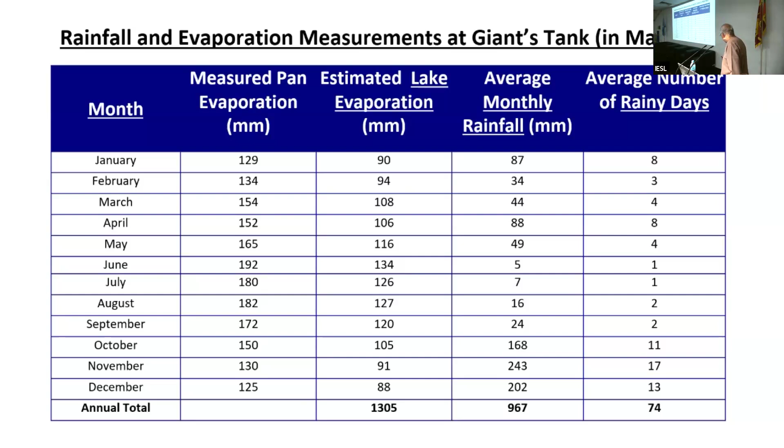And if I put it in this diagram, we can see the rainfalls are, this is the rainfall, that's only October to December. And the rainfalls in June, July are very small, hardly any. And these are the evaporations. The blue color is evaporation.

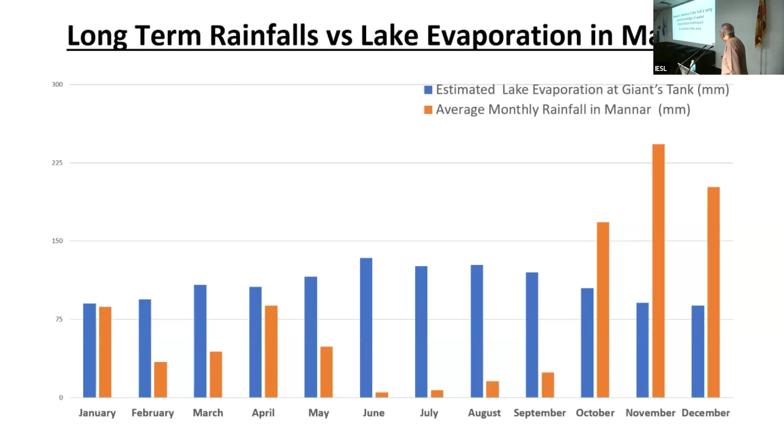And this shows that to survive, the Yakshasha tribe, to survive in that area, they should have had a very good knowledge of water conservation techniques. So I think Mr. Manapiri's view, I don't know whether he did a study, but his view is correct. That's what I believe. So the Kueni Yakshasha tribe they would have had a very good knowledge of water conservation techniques to survive in the area.

And furthermore, I could add that now Vilpattu, Pattu in Tamil, is Ondurendu Mundu Nalu up to 10, the Pattu is 10. So Vilpattu, those are again not natural lakes, but man-made ones.

And this is the palace of Kueni. I managed to get some photos, palace of Kueni at Kalivillu inside the Vilpattu Park. This is again another view of some other remnants of Kueni's palace. And possibly this is the burial place of King Vijaya. I don't know. This is just a guess.

Coming on to the dams, all dams of Sri Lanka are... but before that, I must tell you King Vijaya reigned from 483 to 445 BC, 38 years, and he did some work. He constructed small ponds and small diversions. That's how he continued.

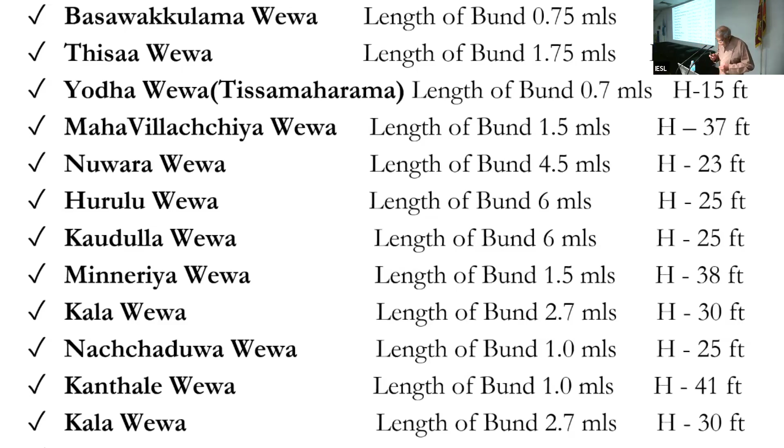He would have used cattle, elephants, or whatever, or given say a 6 mile long bund to a certain village, with perhaps a village headman supervising. But the problem is, if there's some lack of quality, once the reservoir is full, it may breach, because while we are sure of our present day soil mechanics, the king's methods are under threat in that sense. So if it fails, that's the problem.

But I should say this one, this is Minneriya tank. Mineria tank, I was told, has never breached, and it has served probably 1,700 years, every Yala and Maha season, if that is correct. King Mahasena, who built this, is treated as a deity, as a god, and people still respect him.

If you go to Polonnaruwa on the way, you come across Minneriya tank, which has a 1.5 mile tank bund. If you haven't been to that place, please take a drive on that tank bund. Every Wednesday and Saturday, Kemmura Davas, they make offerings to Mahasen Deva. Take a drive, it's quite scenic. On this side the lake, the Parakwas, Mineria Lake, and on the other side you have the giant sluice and all that. It's an amazing feeling. So please take a trip to that.

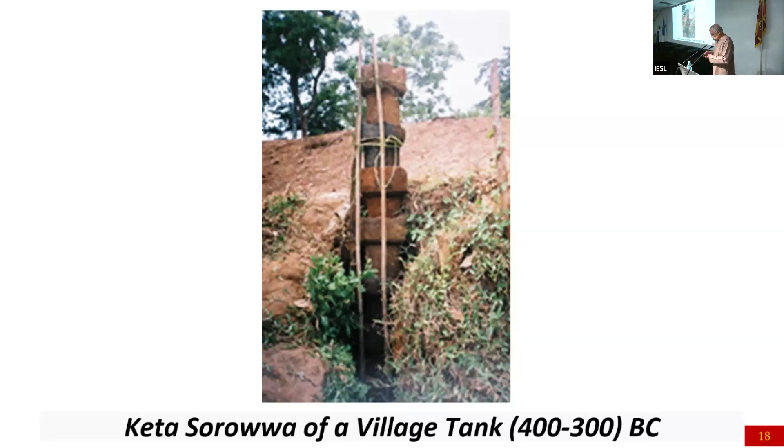You keep going, up to a man's height. At the top, once the reservoir is full and going down, you take the topmost kate off, then water spills over and it acts as a sluice - so spill cum sluice. Amazing, this was done in 400 BC. This is a close-up of the Keta Sorowwa.

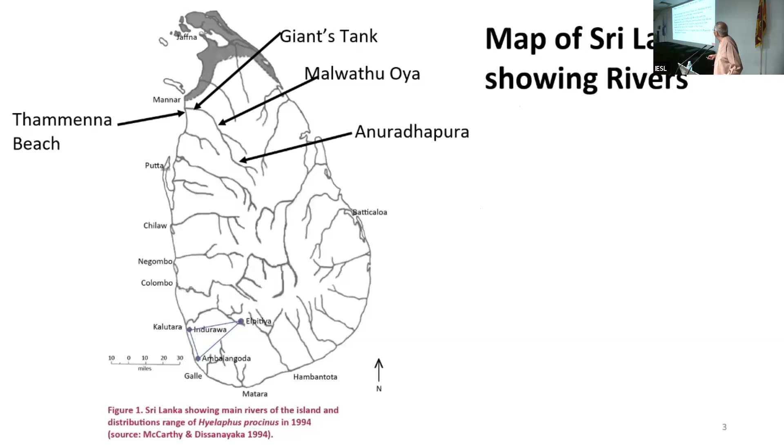Now getting on to - that was for small heads, Keta Sorowwa was for lower heads, but for high heads, what happened? Excuse me for this. This is an excellent innovation by the local engineers at that time, introduced during King Vasabha's period, that's 67 to 111 AD.

But no one knows exactly how it was operated. RL Brohier - sorry, not RL Spittle - RL Brohier did a lot of work, but he's basically a surveyor. He tried to figure out how it operated and wrote books, but no one really knows how it is operated. Some people believe it was over a pulley and pulled by elephants, but whatever it is, there's a sort of double barrel there, merging as per the power needed to pull through.

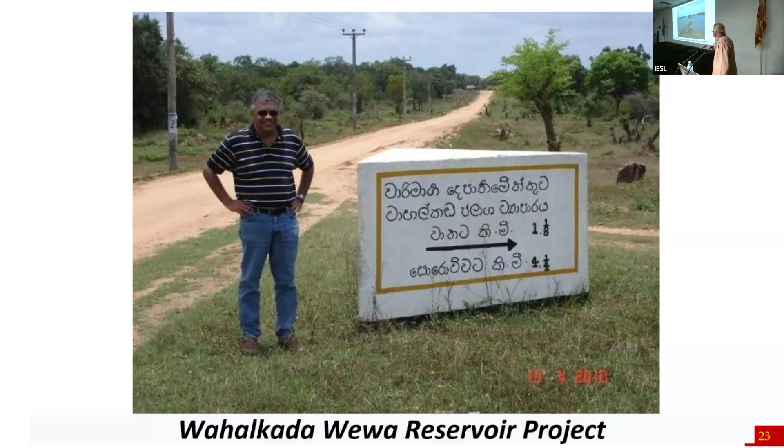So what we did was we did the breach filling at Wahalkada, and it's all jungle. Then the irrigation department has survey maps, and with these maps the irrigation engineers decide where we are going to have the sluice.

But there's a little criteria involved in this, where to locate the sluice. It has to be the highest point of the irrigable area, because it's going to feed water under gravity. At the same time, it has to be the lowest point of the tank bed area, because if it is not at the tank bed, there will be a dead storage, and dead storage is useless.

So with our irrigation engineers locating where to have the sluice, our irrigation people started digging to establish the new sluice there. And we found the old sluice in that very same place. That means our ancient irrigators had known to have the same location, but we couldn't preserve it. It was in pieces.

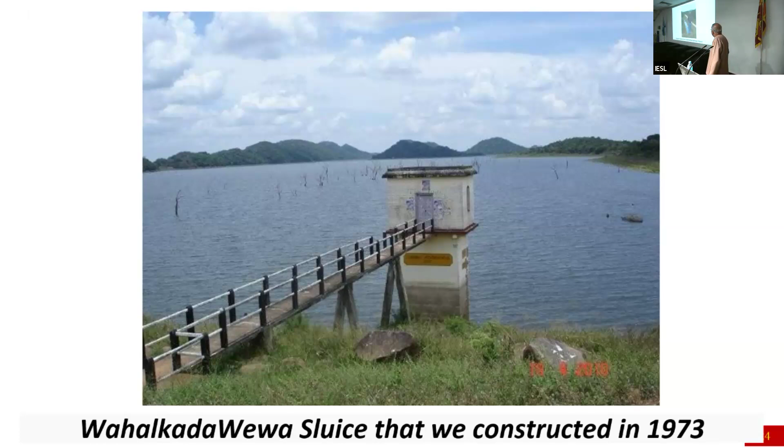This is a channel out from our Wahalkada sluice. This is the preserved Maduroya old sluice. Apparently this is a double barrel structure, and how it was operated, we don't know. We are yet to investigate. There are these stones, all neatly cut and all that. There's a lot more to study on it.

Kalawava Yodala was built by King Dhatusena in 470 AD, and it's a canal joining Kalawava to Tisawava in Anuradhapura. I'll come to it in detail.

But the next one, Alahara Minneriya Yodala, was built by damming and having an anicut at Amban Ganga and taking water. It was built by King Wasaba in 100 AD. This Alahara Minneriya Yodala, after 20 miles, comes to the bifurcation structure called the Dia Beduma, which I'll show you a picture of. The Dia Beduma divides flows to Giritale and Minneriya.

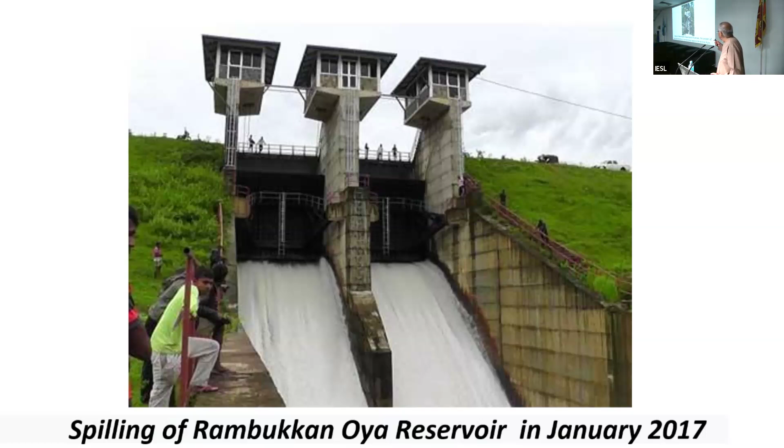Now, getting on to this experience, experiences in the 1978 flood of Parakrama Samudra. What happened was...

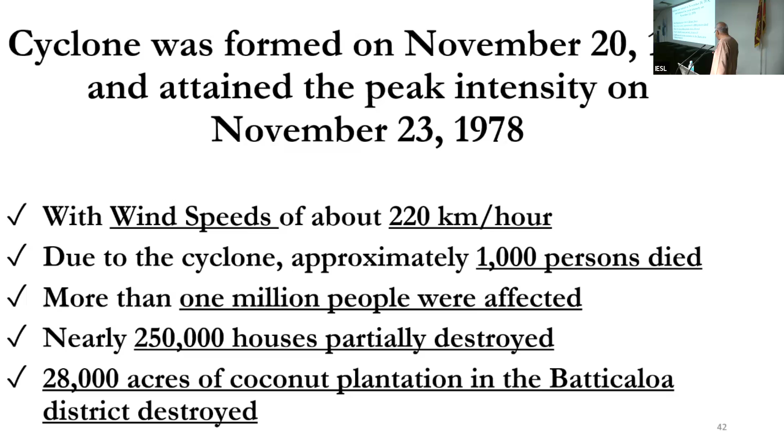That particular day, the Daily News front page ran a helicopter shot showing water overtopping the bund. Mr. Olson Guruwardhana was the director. He called myself and Tilak Nikapitiya, showed us this, and said take a 4-wheel drive and go meet Mr. A.D.S. Gunawardena, who was the I.E. Polonnaruwa.

We did, and also under Mr. Olson's purview, there were drillers who had got caught up in the floods somewhere, and soil testers who were working there. So we had to rescue some people like that, the hydrology people as well. Anyway, we met the ADS, and that's the story.

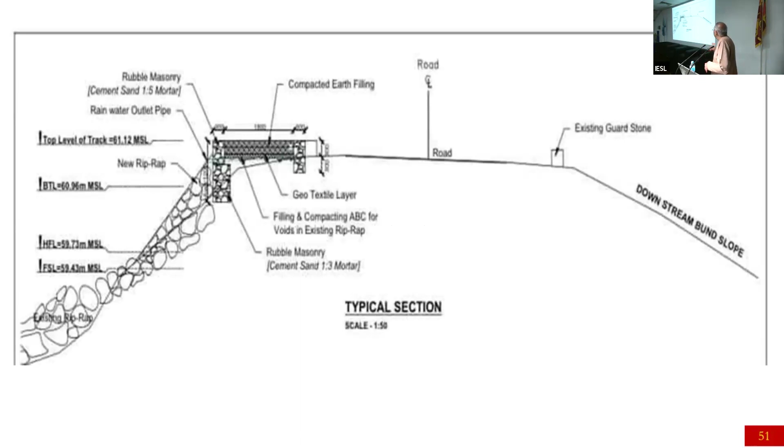They wanted to do it, and the funds were arranged. We managed to get the particular sketch, and this was probably not an engineer's design drawing - some draftsman would have done it. Anyway, whatever it was, they wanted to introduce a jogging track, disturbing the King's Bund.

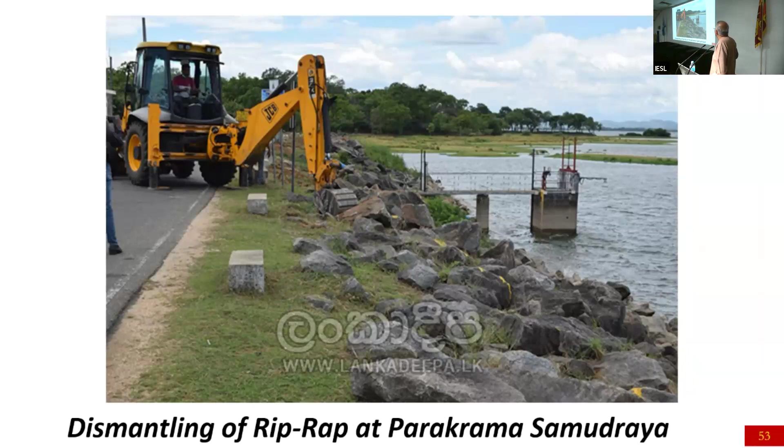What happened was, on the bund, they had drawn some yellow lines, and anything on top, the riprap, was rolled down to the tank bed. I managed to get some photos from Lankadeepa - this is them rolling down the riprap, happy to put the jogging strip there.

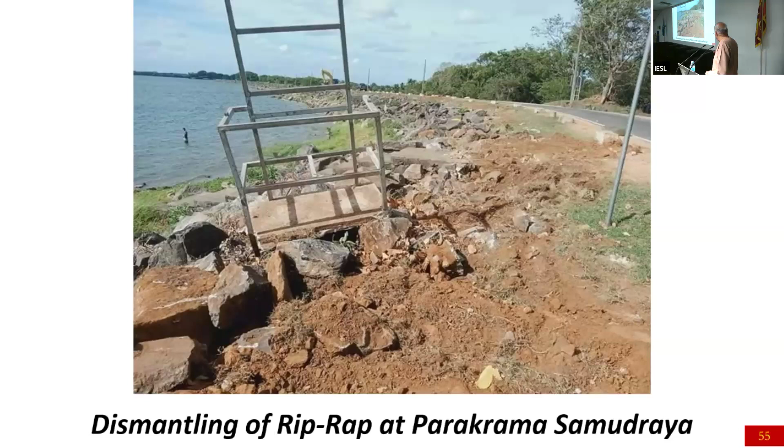And this is the dismantled thing - the dismantling of Parakrama Samudra.

What happened was, Tilak Nikapitiya, myself, Mr. A.D.S. Gunawardena and Austin Fernando wrote a report. We sent it to the Irrigation Ministry, and we managed to show it to Mr. Sirisena.

He was just an MP then, not the president - just an MP for Polonnaruwa, and probably he had some grievance against Roshan Ranasinghe. So we explained it to Sirisena, but nothing happened.

Then we wanted to explain it to Minister Chamal Rajapaksa, but that was not successful either, and Gotabaya Rajapaksa was inaccessible.

But what happened is, luckily or unluckily, the country went bankrupt, so the money was stopped. Then our argument was: if you leave it like this, don't leave it - if a 1978-scale flood comes, this will be gone.

So please put the riprap back again. I don't know - Janaki says it has been put back. If that is the case, well and good.

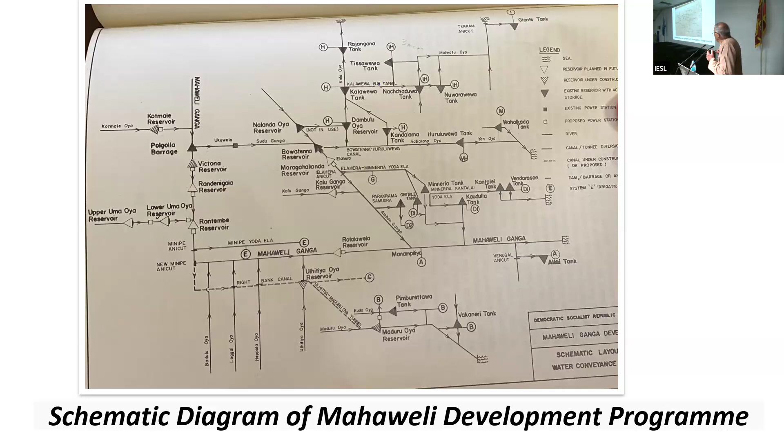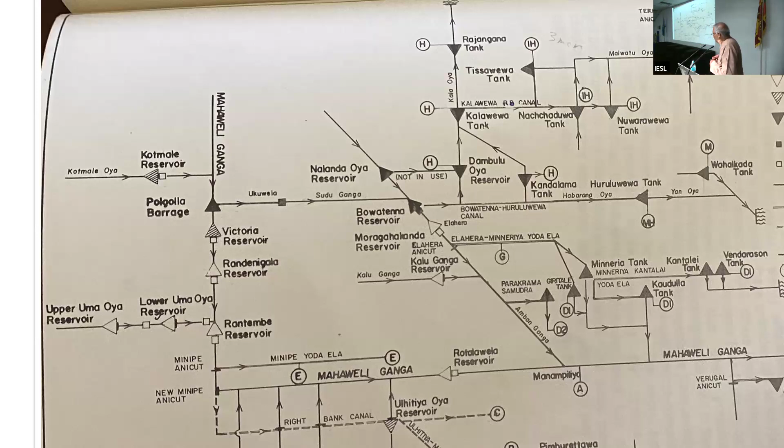So my account of modern development stopped at 1987. These recent ones are not included, all this, Moragahakanda and all these. This is what I managed to cover, up to '87. Thank you.

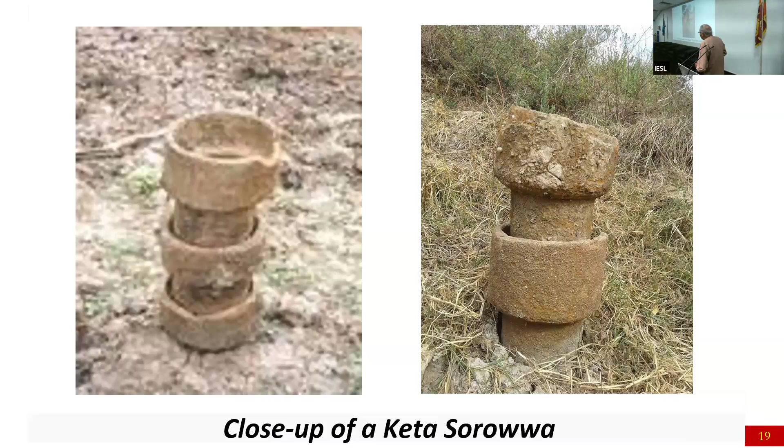So this top part is like a reservoir, you can remove the first rectangular section one by one, like a weir. But these are at a high height, about 30 feet, they had structures for it.

I'm not sure, we are also guessing because we don't know. You can have a chat with your friend Vanchi, he had done something, he's the one who came up with this idea. Dr. Ranjit, have a look at it. Sure, thank you.

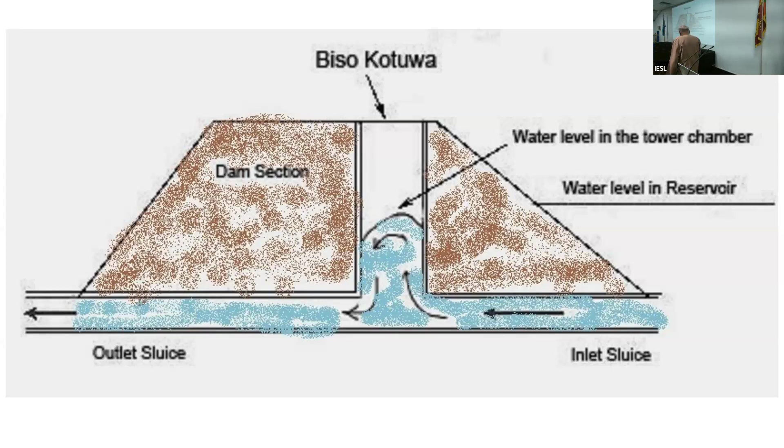So you reckon it is to be? Look at the reservoir, the other reservoir. And as the water level recedes, you remove the container, right? So now imagine the Lokoto is a large reservoir, a huge one. And what do you remove?

You remove the first rectangle, and for that they had structures to remove it. So it's a mix, it's not in the dam, it's never in the dam. You can see any Bisokotuwa drawing, it's never in the dam. These things grow here.

Thanks, Pancha, it was a very good explanation. But my question is not to Pancha, it's to somebody here currently in irrigation water management. These ancient dams, we don't know how they were built, but...

Presently for disaster management, I don't know if we have a system of getting data. I know the irrigation department in those days had soil testing and a lot of records. Whether it has been continuously monitored, the large dam 9 miles long, getting core samples, core water pressure measurements, and seeing how it behaves, so we don't have another disaster like Kanthale, which was man-made, I know. But then, because these are ancient ones, we don't know how they were built.

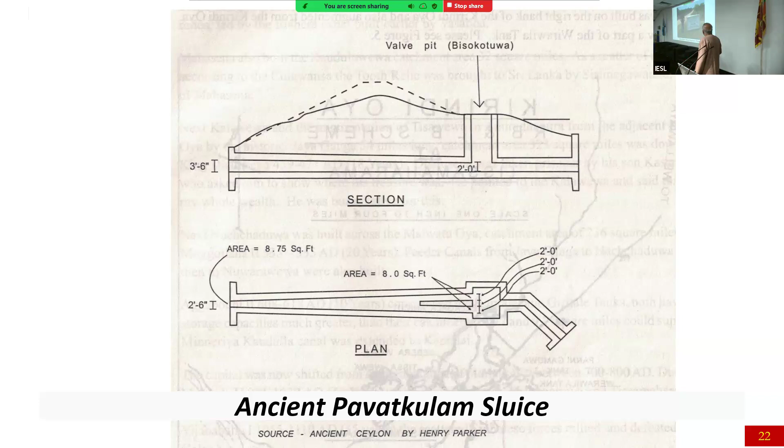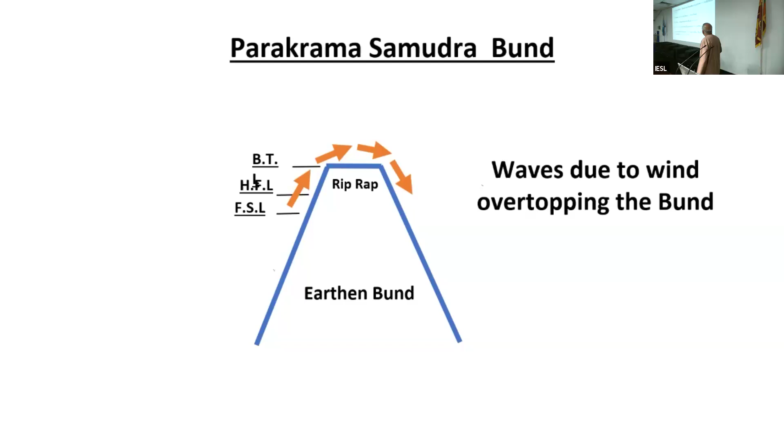Yes, that one. Now you see some rocky structure, what is that, is it a name? This is actually, I got these two photographs. From inside the dam, inside the earthen dam, such a structure is something very peculiar, could have been a sluice or something.

These rocks, it's open for discussion. That's what I'm asking. No, not the riprap, riprap is on top of the dam. I think this is the sluice structure, something very special there, or the abutment of something. Tilak Likupitia gave me this photo.

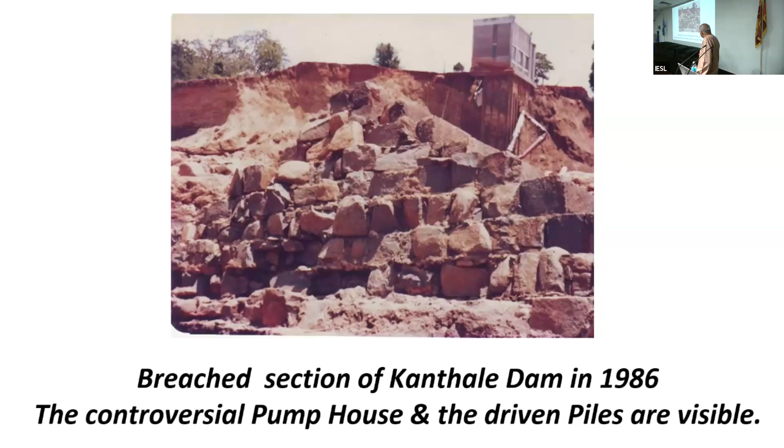I can remember Dr. Bala Subramaniam, our lecturer - when we were doing the coursework, he was telling us in detail: you work it out, divide it into thin slips, and in each of those, that pore water pressure you were talking of, it can't sustain it because that's a natural tendency. So that's why, even on the road, if you see an earth slip, he was talking about - watch for these slip circle failures.

So Bala was doing that - thanks to him, when we saw this the following day after the flood, I was telling ADS, this is a slip circle failure, because it can't take up the pore water pressure so high that it slips. So thanks to Bala, I straight away said - thanks to Dr. Bala Subramaniam. He's now somewhere in Queensland.

Is there any evidence that in the King's period there was any dam breach situation? Because all these tanks that the irrigation department restored are owing to some major flood one day or other that caused them to be lost. So in those periods, how did they handle this situation? It's anybody's guess.

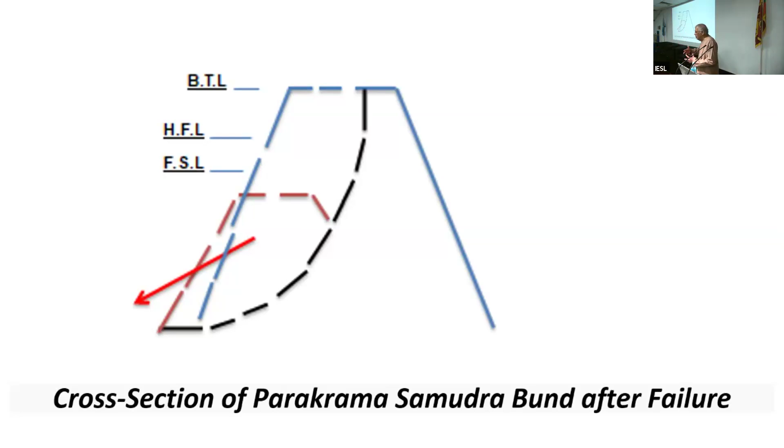And the other one was saying about that. I think I'm sure this dam safety committee would have resulted in better use of it. I'm sure. Yeah, I know. Right. Exactly.

Even in the '78 flood, we were concerned it might break at an unwanted point. See the damage - it was a critical situation.

Actually, after that '78 flood, in '79 I went to study in Australia with the civil engineering program. I offered the subject of economic feasibility of dams, and I presented a case study on this. Professor David Havel was shocked to see it - he was really interested to hear about this case study because it's a composite thing. It's not just about releasing water, there are social things too - the public, we have to safeguard the public, everything. So it's not an easy thing, but these guys now say, why didn't you release the water?

Just one observation and one suggestion. The observation is similar to Vaharakade - I was working at Inginimitiya. There too, when we were digging the spill, we found the old Madasorowa. This word Madasorowa is not used much now, but as far as I understand, it would have been on the small water course which was dammed to make the reservoir. There would have been some small water course dammed to make the tank, so that is really the lowest point of the tank. I think each of these, even village tanks, will have today a Madasorowa buried so many feet under the ground which we have forgotten. It's only when digging for the spill that we found that out. I remember at Inginimitiya it was handed over to the temple which was there.

Right, that's the one. Yeah, you're right. And just one other thing, small thing.

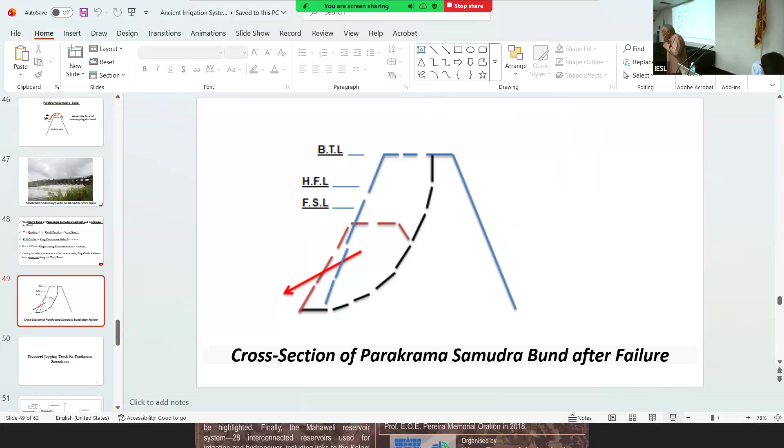My suggestion is, especially for young engineers to study these things - now we don't have the 1-inch maps. They haven't been published for the last 50 years. Only the 50,000 scale is there, and that hasn't got half the old details which the 1-inch had. So if we want the younger generation involved and interested, maybe at least a digital format should be available, where we can overlay the 1-inch on the existing 50,000 layer, and add the Mahaweli schematics as line drawings onto these things. Only then can young engineers get the feel of what has happened and plan for the future. I think this has to be a top priority where government agencies get together and do it, otherwise we'll keep losing information and making wrong decisions in the future.